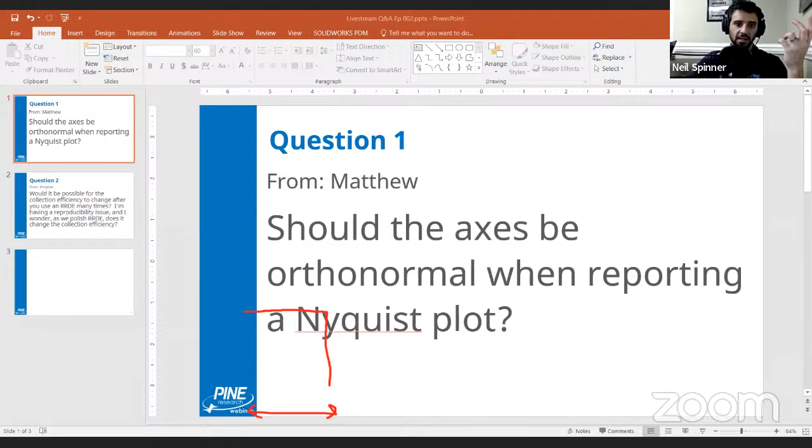if I were to draw a perfect semicircle, which this is also not really perfect, but let's just say this is a perfect semicircle, you can see that this is squashed down. It's not ideal. And I can only really tell that because my axes are perfectly orthonormal, because they're square.

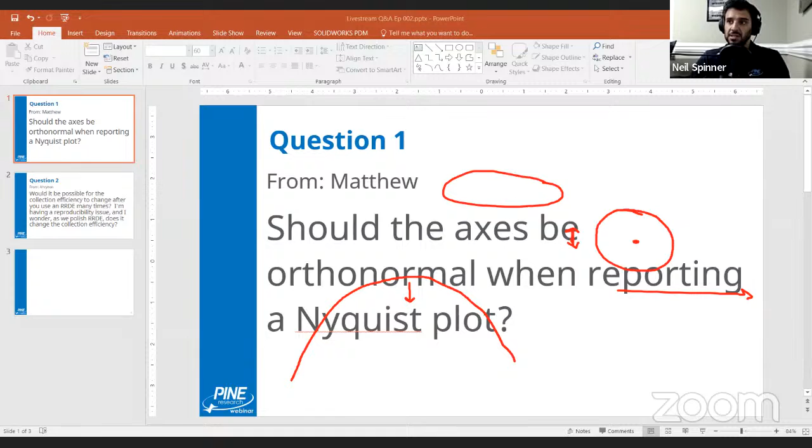So if I have a circle, if I were to draw a circle or a semicircle, again, pardon the artistic inability here, but it would look perfect. Whereas if I zoom or squish one axis, but I expand another axis, my circle will start to look like an oval, but it's just because I'm looking at it strange. It's not that it is or isn't ideal.

And so the last thing I'll say about this is something I used to actually feel when I was in graduate school. I've completely reversed my position. So you can change your mind. That's what scientists do. We change our mind in the face of new information. And in my case, the new information was everything I just talked to you about. It's like, oh, I can get a ton more information if I have orthonormal axes.

What I used to think, and why some people do occasionally prefer to not have orthonormal axes, is because you can fit everything in the screen, right? When we plot data in our publication, in our paper, in our presentation, we want to fill the white space, right? We don't want to have all of our data in one tiny corner with a bunch of blank space. That's sort of bad form. And one of the consequences of orthonormal axes is exactly that. I have all this empty space. Now I could, if I'm publishing this data, I can do things like decrease the...

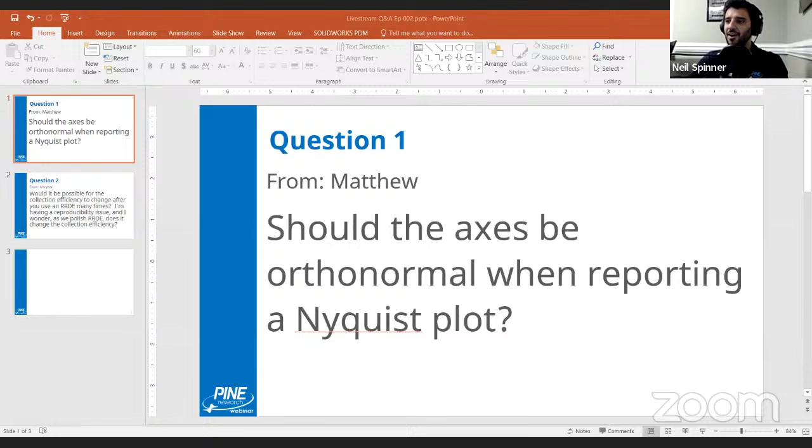Hey Neil. Yes. Question. Are you using AfterMath right now? I am. Oh, okay. Have I not been sharing? You're not sharing. Have I not been sharing this whole time? No, you've only been sharing the PowerPoint. Oh, well, wait a second. You should have interrupted me sooner. I just thought you were. Oh my gosh. I didn't change the application. I shared the PowerPoint and not the application. Good grief. Oh no, it's all good. See, these are the things that you get to enjoy, the troubleshooting of absolute inability to work simple programs. Don't worry, Neil's gonna switch to AfterMath, and I've got it going now. So if you're hearing this, you should hopefully be seeing it. So everything I just showed you was not captured. So I'll try to do a bit of a quick recap. You didn't see any of it because I'm really bad at this software, apparently. It's all good. I'm usually sharing screen, but I shared the PowerPoint application. Brilliant. Absolutely brilliant. All right. Start over.

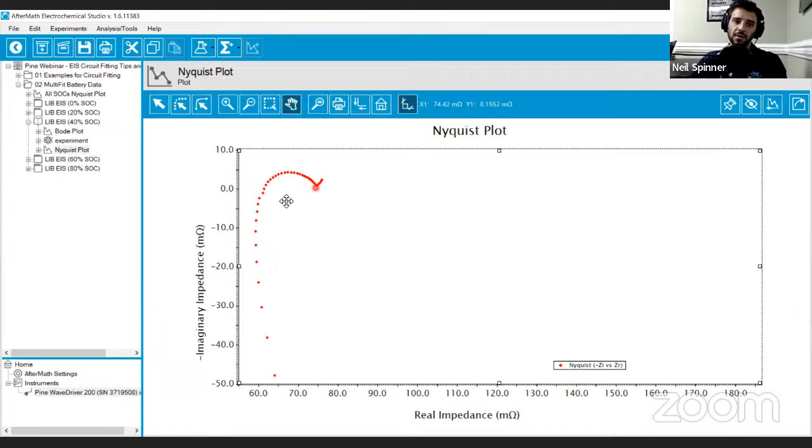We're good. Orthonormal axes are really important. So this is what I was showing while you couldn't see it, right? See the blank space when you have orthonormal axes? That's one of the problems, right? Now I can adjust the axes of this to eliminate that space, which is what people tend to do in publications, for example. But this is one of the arguments for not restricting to orthonormal axes: you get all this blank space and there's nothing you can do about it. You can't just zoom the x-axis in, because then it would get distorted. You can center it, but that's about all you can do.

So this is why, for example, as I said, when I was in graduate school, I used to kind of be like, I don't want to orthonormal my axes, it's fine. And if I want to tell how ideal my data is, I could just do a circuit fit, and that'll give me CPE and alpha and all this different stuff.

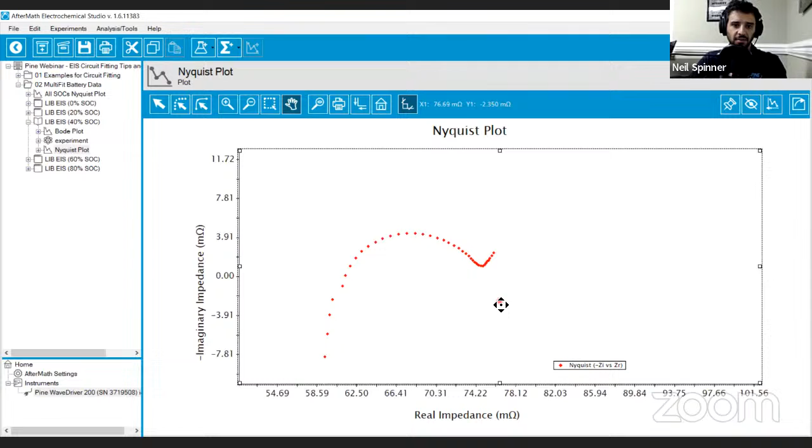I think that since I was in graduate school, not only has my opinion changed, but also in a lot of the research and papers that I see, it is much less common now to see data that's not on squared orthonormal axes. You'll get people kind of bugging out about it if they see data that isn't this way. You'll have reviewers or other researchers look at you and be like, why is your axis not right? Because they're expecting to see it in the orthonormal convention.

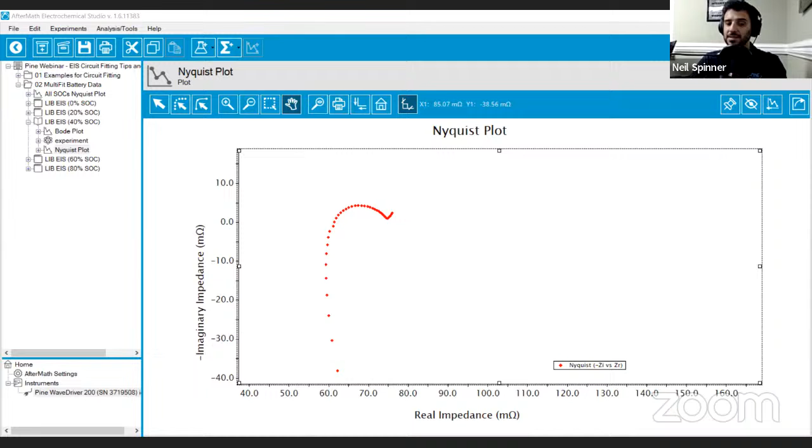So half of that was useless, although I did draw on the PowerPoint slide. I was actually drawing in AfterMath, but you couldn't see it. So yeah, great. We're off to a great start. You're welcome, everybody. Yeah, can't see anything in AfterMath. No, now you can, and that was my fault. So I'm very sorry, everybody. And let's continue with this amazing Q&A session that I've severely hindered here. Okay, it's all good. Man.

So we have a question from Tanae, who I actually met at the College of New Jersey, and they're using some of our equipment and potentiostats, and they're doing cyclic voltammetry experiments. The question is actually very simple. What they're doing is taking the first derivative of the data to find peak potentials. And I know that Dr. Prada comes from more of a spectroscopy background, so it's very common in spectroscopy.

Is that the PI? Yeah, that's the PI. Okay, I don't think I know who that is, but he started maybe 1 or 2 years ago. Is that Tanae's PI? Yeah, that's Tanae's PI. And do you know Tanae and Gio, or just Tanae? I met both of them. Oh, nice. I can't remember exactly when I was in New Jersey. It was in November 2022. So they've been doing some work now.

But to find peak potentials, yes, you could take the first derivative, and the peak is when the tangent is 0. But I would say most people in electrochemistry find peaks just visually looking at the data, or using a peak height tool. I can show some stuff while you're talking. Go ahead. I'm gonna share AfterMath this time properly, while you talk more about it. I have some data I'm gonna try to show.

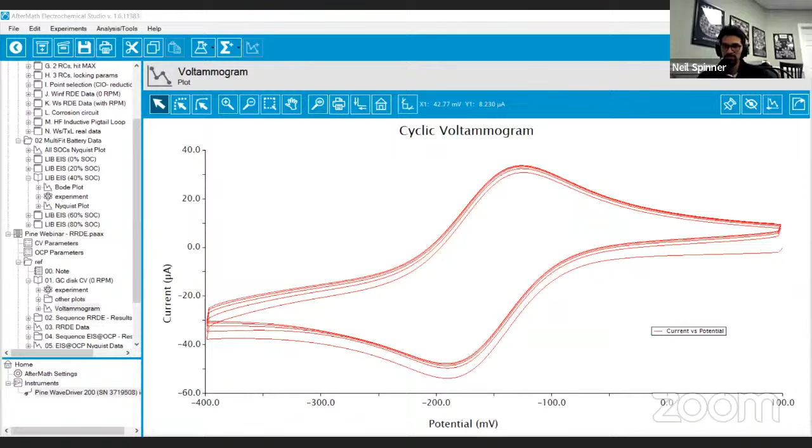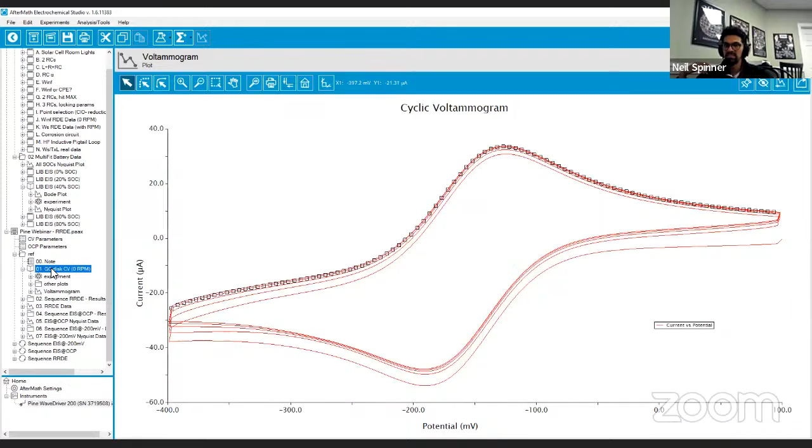Most of the time when people are doing cyclic voltammetry experiments, and I'm pretty sure you're looking at a diaryl amine, you have probably millimolar concentration of the species. You're getting microamps or so of current. The peak associated with an oxidation or a reduction reaction, whether it's multiple electrons, should be relatively easy to see. But you are looking at kinetics data. So perhaps a further question is what kind of experiments are you doing? Are you doing scan rate dependent experiments, and looking at peak shifts? Because some of the data looks a little bit like what Neil has, just voltammograms.

While you're talking, I'll just say what I'm doing briefly. I'm going to show you both options here. This is just some random RDE data that I did during my RRDE webinar. It's just a simple CV, but there's a peak, so I thought I'd show you while you're talking about that, Alex. And Gio's data did look like that, multiple CVs on top of each other with small differences. Neil can show the peak height tool. Let's see, they're doing scan rate and concentration dependent experiments.

Okay, so when you do scan rate or concentration dependence, the peak is going to be changing, especially with scan rate. What's that? That's the Randles-Sevcik equation, right? See, I want to do the slope. I'm just gonna kind of show you. You can get it, Tanae. The question is, if you have a species,

are you getting noticeable shifts in the potential? Because ideally there shouldn't really be that much change in the potential. Maybe when you change the concentration, you might get a little bit possibly, but generally speaking, you shouldn't get too many shifts in the potential.

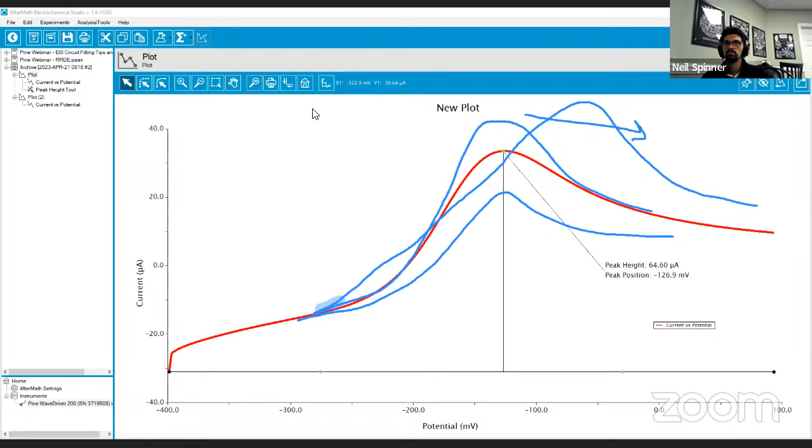Okay, great. But if you get faster scans, for example, and it starts shifting this way and the peak starts moving, that's generally an indication of pseudocapacitance, or excuse me, pseudo-reversibility. In theory, assuming a perfectly reversible reaction, the peak position is independent of scan rate.

Yeah. And the shift may also possibly be associated with IR compensation. If there's some solution resistance, you can get a little bit of peak shifting. But all right, so they're introducing pyridine to the system to see a second redox peak. I actually worked with pyridine as a graduate student. It's an interesting base. There's a lot of controversy around that molecule for what people were claiming it was doing. I have not used pyridine.

So pyridine, it depends on the pH of the system, but if you have an acidic solution and you add pyridine, it's a weak base. So it actually takes a proton. It becomes pyridinium, and pyridinium on platinum electrodes, and to a certain extent silver and glassy carbon and others, can be reduced. But actually, you're just reducing the conjugate acid of pyridine, the pyridinium. It just reduces the hydrogen on the electrode surface.

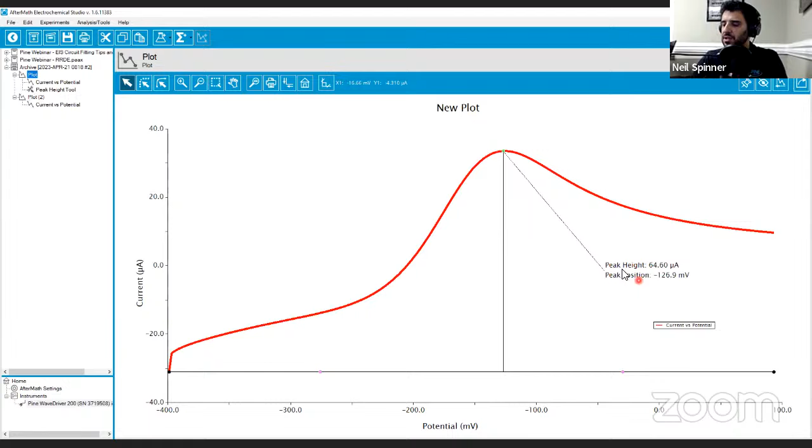You can see the peak height tool, right? It's pretty self-explanatory. So that's one easy way to get the peak height in current. But if you want to do a derivative kind of thing in our software, it depends what software you're using, but you can do integration and differentiation. So you can differentiate first order with respect to x, for example. We won't replace it, we'll leave it. So this will add a secondary y-axis.

The unit is a little wonky because technically, when you work out the mathematics, the derivative ends up being current over voltage or something like that, so the units are basically inverse ohms. But anyway, this new trace is the first order derivative. So this can be done in our software. Some softwares can do similar things too. So you can do derivatives, and that can help clarify the peak.

Although the tricky thing is that the derivative is not always going to be equivalent to where the peak is, because the derivative at any moment is the tangent, the slope, right? And so this right here is not really the peak. So it depends what you're looking for. You might be looking for the actual max derivative, and that's fine. But that's basically just where the slope is maximal.

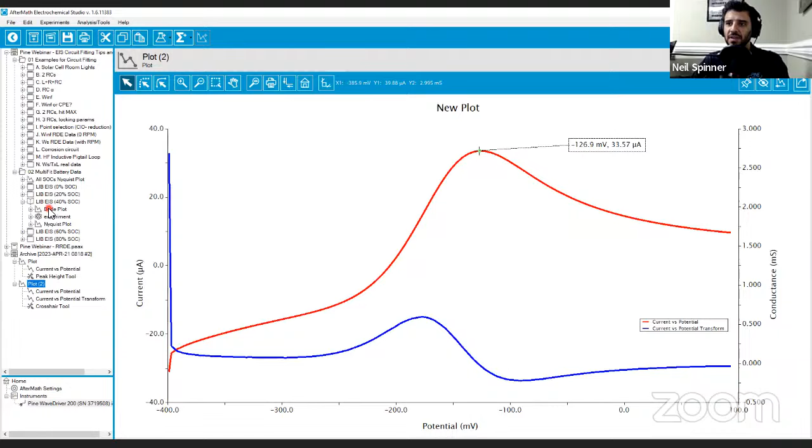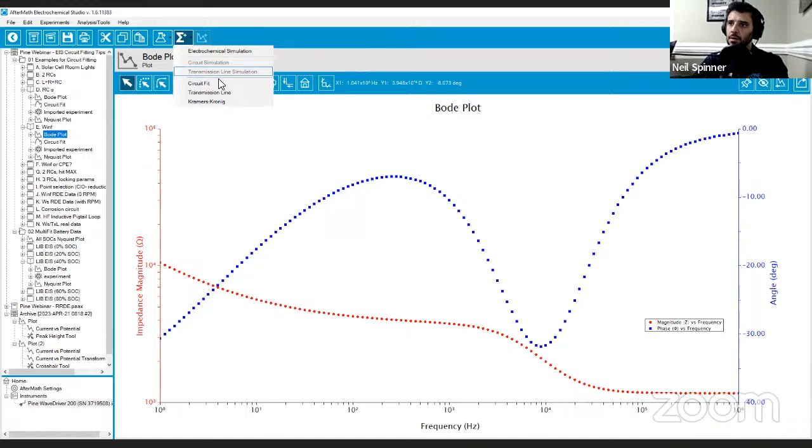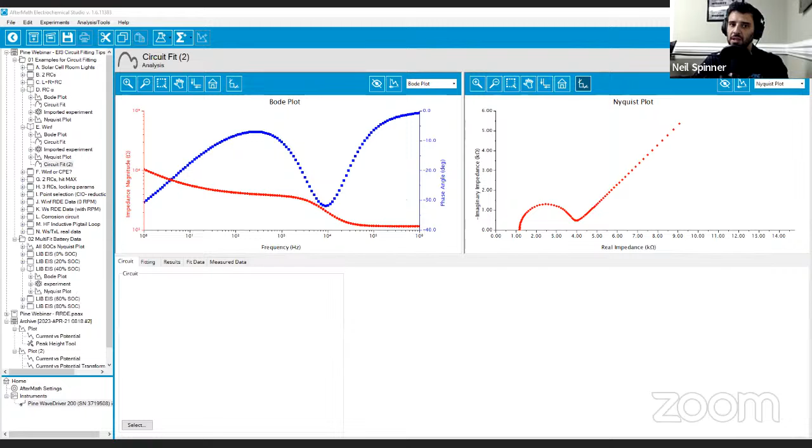But really the better point to make is that when you're doing a circuit fit, for example, you see both of them, right? And so having both visible is really the ultimate goal here, because, just pick any old circuit here. This one is probably the right one. In some cases one of them may fit better than the other, and it's helpful to have both, because here, if I'm just looking at my Nyquist plot, I might say, well, that looks pretty good. It deviates a little, but in my Bode plot, I can see clearly that this peak is nowhere near lining up properly. So if I have one or the other, I'm going to miss how terrible my analysis is. So that's just one reason to have both.

In some ways, I think the Bode plot is really helpful when circuit fitting, because more often, I should say, the phase angle is not quite right while everything else might look okay. And so it can help guide you to say, well, I don't quite like how that fits. Everything else looks almost okay, but the phase angle's off. So it'll help you realize you need to keep adjusting some parameters to get the fit to be where you want it.

And that's one of the nice things about having that Bode plot visible, especially when you're circuit fitting, because some software programs just show you one plot. For example, you'll just see the Nyquist plot. You might think you got a great looking fit, but the Bode plot's way off, and you don't know that if you don't see it when you're fitting live. So that's the first one.

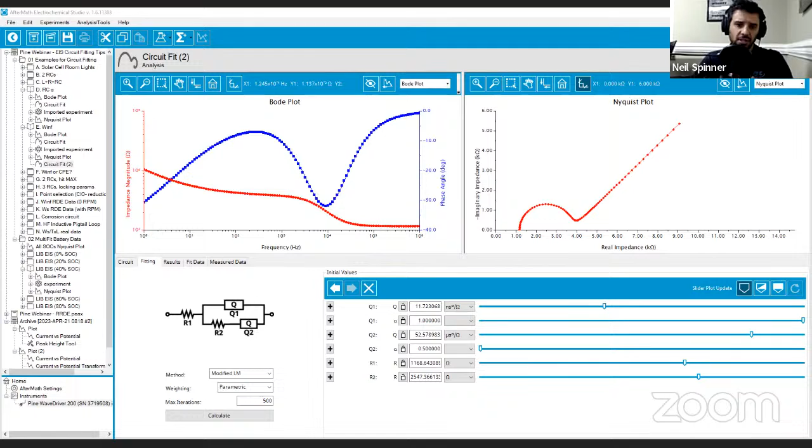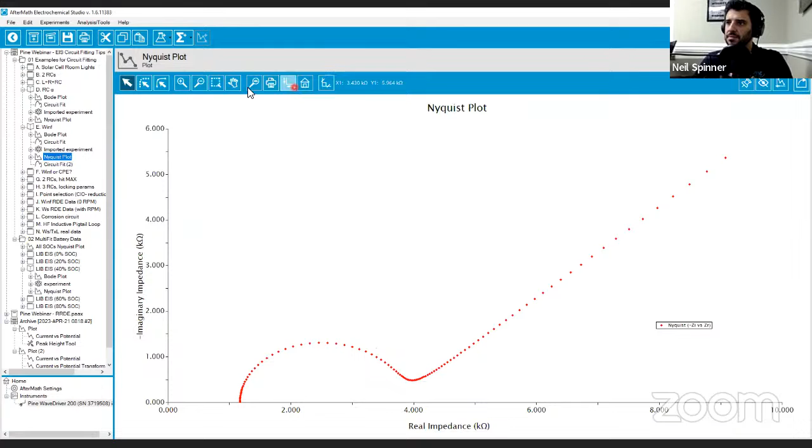The question was asked about inverted RDEs. This is a good question. I'm just gonna get a blank canvas here. Forget about the Nyquist plot. This is now just a blank canvas. Inverted RDE is a really cool idea.

You're still in AfterMath. I know, I'm just drawing. Okay, good. It's just a blank AfterMath. Perfect. Making sure. Every 5 or so seconds, you need to remind me what I'm doing, because I'm apparently liable to be doing the dumbest possible screen share you can do. I think this is appropriate. I just wanted a blank white background.

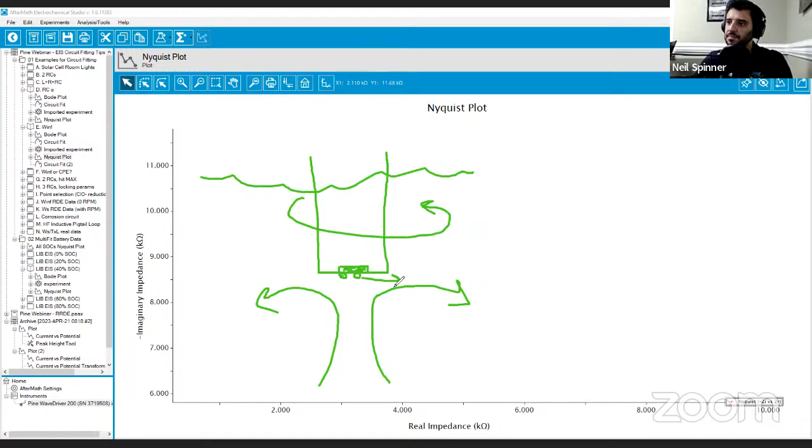So if you're doing a rotating disc electrode experiment and you're rotating this thing, you have solution, and you're vortexing, doing your happy RDE experiment. The problem is that if a bubble forms here, it gets stuck. You're doing HER, OER, whatever. You get bubbles. Often these bubbles will sweep away because the solution's moving. But sometimes the bubble is so perfectly dead center that it won't jostle free. And it's super irritating.

You might be getting your curve, and then all of a sudden it goes crazy because a bubble is breaking up the interface, and you can't get the bubble away. I know some people have that struggle. One of the solutions I've seen once, not something we designed, but a customer with some of our rotators and electrodes pitched it at an angle. So this isn't inverted, but the rotator's at, say, a 30-degree angle.

Because it's at an angle, as long as your vessel doesn't have sharp corners or something like that, you can still get a vortex and the kind of flow you're looking for. But if there's a bubble, because of gravity it's more likely to escape at an angle. This is harder than you think, actually, to do.

Maybe it's not harder than you think. Maybe you think it's actually quite hard. And if you thought that, you're correct. Making a rotator is a lot more complicated than it seems like it should be. It seems like it's a stick and a motor and it just spins, and it's like, well, why is that so hard? It's apparently kind of hard. There's a lot more to it than it seems like there would be, I guess I'd say.

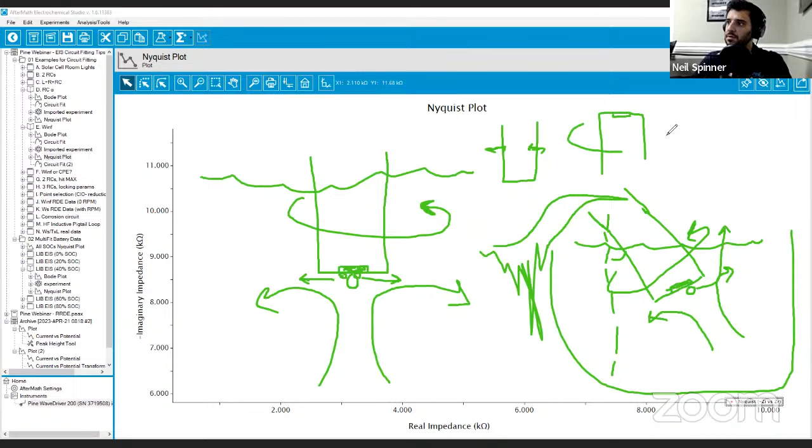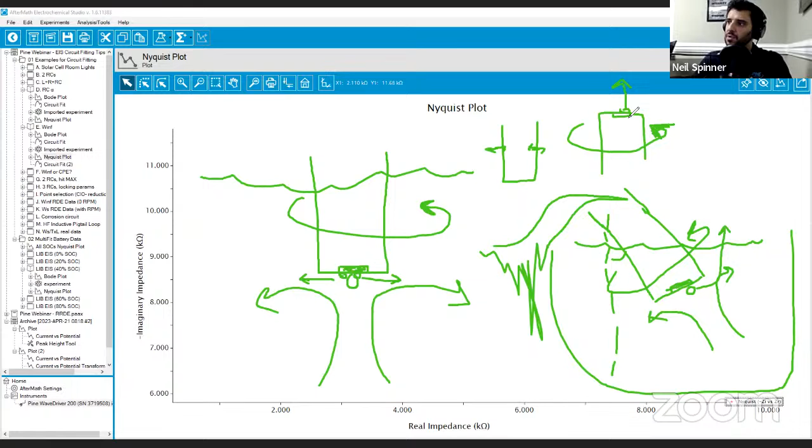And then the other part of this question was, can I do inverted? What if you do it upside down? That's the ultimate, right? If you had the thing upside down rotating, then if there was a bubble, it's just going to escape easily. That's a really cool idea. And there are some companies, I think, that make similar apparatus, where you basically have an inverted, what is this called? Spin coating, right?

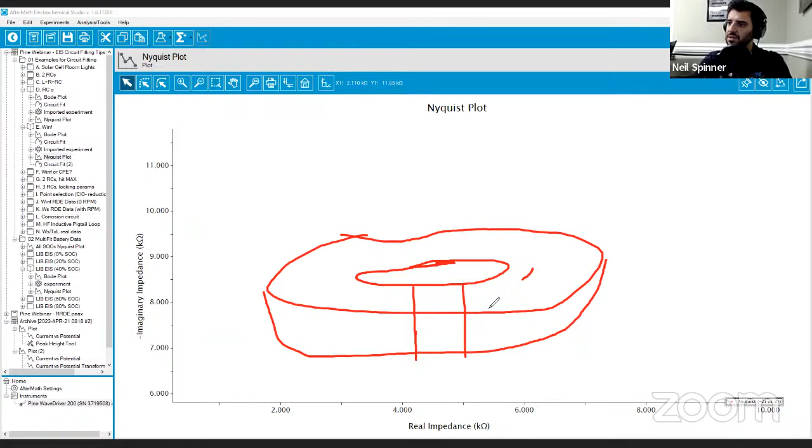So there's spin coating machines where you put a silicon wafer or something like that, and it's suctioned to some sort of spindle or shaft, and then there's some sort of basin to capture everything. I'm drawing this a little bit crudely, so go with me for a sec. You're spraying something onto this surface, and the excess flows around and is captured in this basin, and this is spinning.

The easier part of this is that you might be spraying something, or sometimes you're dripping a solution on while maybe running some kind of current through this. Run out is bad, it's very true, Dan, I agree. The tricky thing about doing RDE in this configuration is sealing everything. It's just fundamentally difficult to seal something that's rotating, especially if it starts rotating quickly.

If you were to do this stationary, it'd be easier. You could just put some kind of an O-ring seal around here. You'd have your electrode, some sort of vessel, and then your counter electrode and your reference electrode, and you could do your electrochemistry. But as soon as you start rotating this electrode, the O-ring seal would rip apart. That probably won't work very well.

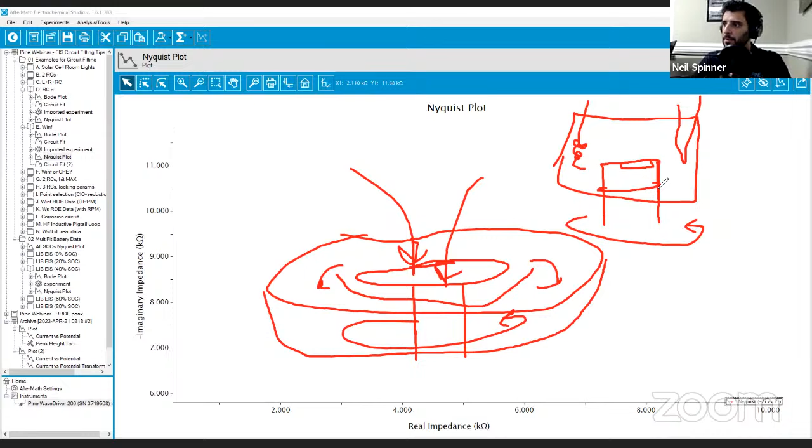There's some trickiness here. So it is also something that we would love to do, but the R&D required is also not trivial. Simply put, we're a small company, and we have other stuff we're working on. It is something I would like to offer, to be honest. It would be really interesting to have a useful commercial solution for inverted RDE, but it's harder than it seems, and it's not something that we have at the moment, unfortunately.

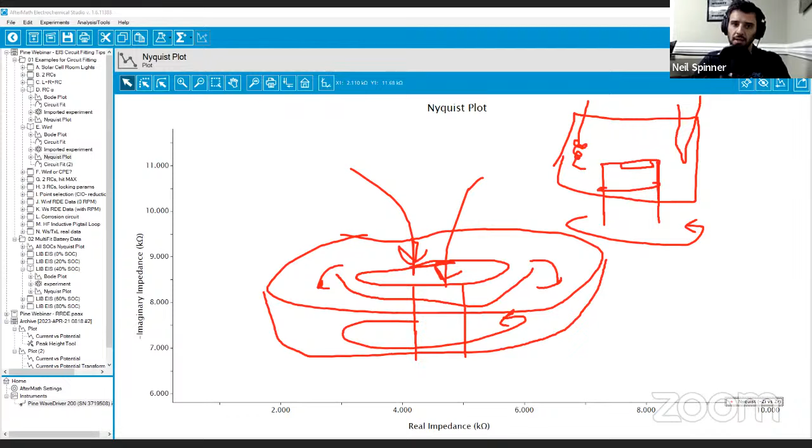I think, Alex, I'll let you take over here. Oh, well, we got a question from Honest Makamba. Again, very sorry if we're butchering your name. I'll refer to you as Honest.

Honest is asking that, we've read many papers with redox couples, and they just mention, kind of randomly, the number of electrons that are transferred, with no information about how the number of electrons is calculated. And so he wants to know how this is done. I think there's numerous ways to go about it, but it depends. So what I'm gonna do is share just a blank PowerPoint.

So hopefully everyone can see this. And then under Zoom, I can use the annotate. Not the annotate. Okay. Oh, I get the right. Yeah, it's like a highlighter. I did the same thing. I'm like, oh, that's not gonna work.